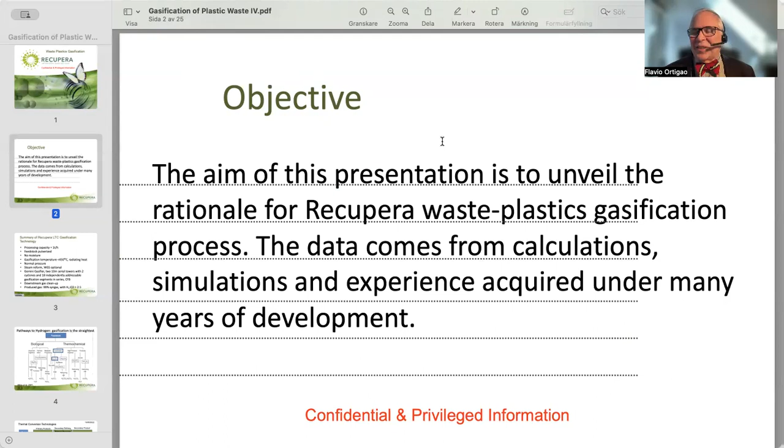So the objective of this presentation is to unveil the rationale of Recupera and Relab waste plastics gasification process. The data comes from calculation, from simulation, and experience that we acquired under many years of development. It took us decades to come to the point that we are today.

Let's make a resume here about what we call low temperature conversion gasification, and let's also say this is one of the important points, what is different from everything else. Low temperature gasification is something we have pioneered from an idea set forth in Germany, in Tübingen, but it was never reduced to practice in Germany. So we were the company that developed the gasification to work with this technology. This technology has one thing that you should remember: gasification below 450 degrees. Why that is important, I will come to that later, but this is very important.

The state of the art of gasification, there are two technologies available out there. There are, in fact, some 100 different types of gasifier. They are all different, and everyone was created for a specific purpose. So the purpose of the gasification is very important to the design and construction of the gasifier. You have always to ask, what is the purpose of this gasifier? But the gasifiers out there, they either work around 2000 degrees centigrade, or if they are plasma gasifiers, they will be around 4500 degrees.

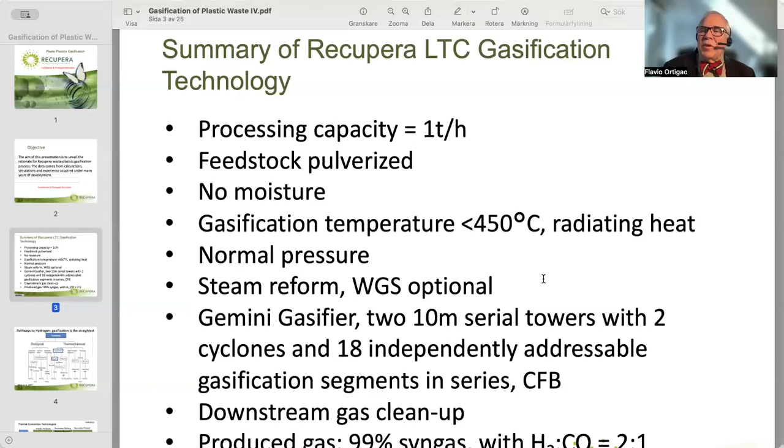It is normal pressure. Some people will start always telling me, I know it's high temperature and high pressure. No, it's not. It's not high temperature, it's not high pressure. It's normal pressure and low temperature. That is how we do it. Some others, how others do it, well, I don't know. And of course, it is a steam reform, so we use steam to oxidize, to provide the oxidant for this gasification.

I will speak about gasification. One important point: water shift is not part of gasification. A lot of people say you have to gasify and do water shift. No, you don't. People who say that have no prima facie experience in gasification, because even the equipment is separate. Normally, when you gasify hydrocarbons, you do both reactions. But this is normally - we are not speaking about normally. We will speak about what we do, and the reason will come.

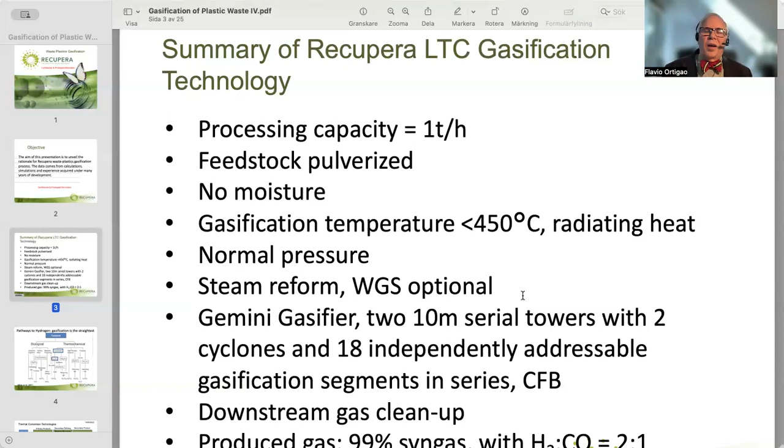So normal pressure, no water gas shift. It is a Gemini gasifier with two 10-meter serial towers with two cyclones and 18 independently addressable segments, which can be considered as gasifiers. So we would say I have 18 gasifiers in series. And why we do that, I will explain later. But this is the technology that provides the quality of our gas.

And what differentiates us from the rest? The quality of our gas, the way we do it, because this is fundamental to the purpose, to the applications that come downstream. And of course, the application is downstream processing. So we develop a gasifier that produces a gas that is not to be burned. The gas is not to be considered a fuel. The gas is not to be used to produce energy. The gas is to be used for chemistry, as feedstock for renewable chemistry. This is the reason why we develop our gasifier.

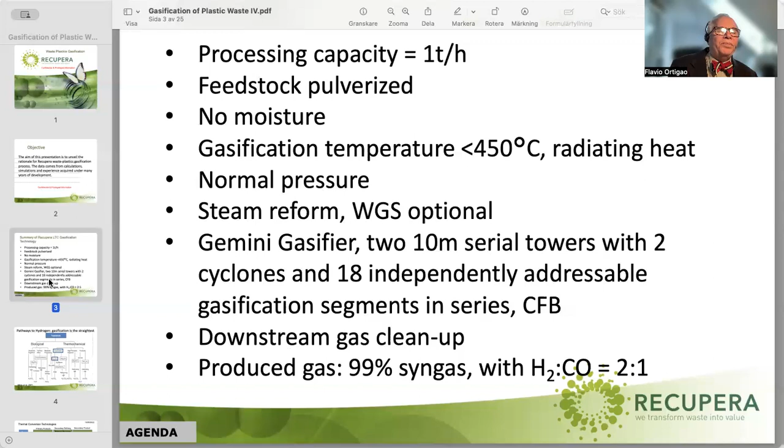One important point: gasification occurs almost quantitatively. People who know gasification will know that. Gasification is different from pyrolysis, where you have three phases - but I will speak about that. It's almost quantitative - you will get 99.9, 99.99%, and if you purify, 99.999% syngas. And syngas, this definition is very clear and has been in the literature for 200 years. So please, this is not really new. This is something that's very well established.

Syngas is a gas composed essentially of hydrogen and carbon monoxide. Of course, in this 200-year history, the quality was not always the same. So syngas in the beginning was very dirty, very contaminated with a lot of stuff. But with time, more and more syngas has been cleaned and produced with high quality, and high quality syngas is only hydrogen and carbon monoxide with a ratio of 2:1. So this is by definition syngas. Now,

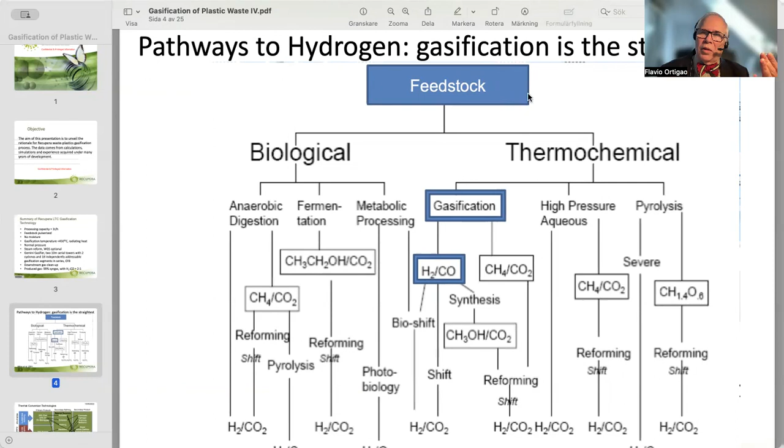Let me tell you why we choose gasification. We could have gone to other technology, and of course in recycling of plastics there are many technologies out there. Why do we choose gasification? Because if you compare, there are technologies which are biological and there are thermochemical process recycling processes. I'm talking about the feedstock - waste plastics, but it could be any carbonaceous feedstock - could be wood, could be biomass, you name it, as long as they have carbon. Gasification is the straightest way to producing hydrogen and carbon monoxide. And in many applications you are looking for hydrogen and carbon monoxide pure. So there is no other way to produce it as straightforward as gasification. And that is the reason we have gone for gasification.

Of course, after the gasification, if you want to boost the production of hydrogen, you may go to a water shift reaction - you may add a separate reaction, but this is already downstream processing. Gasification: one step gasification, and you have syngas. And this syngas can be used for synthesis, and I will speak about that later. This syngas can be used - so gasification is the straightforward pathway for producing gas. All the other technologies will take a lot of steps to come to the same thing. And each step, if you understand thermodynamics, you know that each step you have to pay something. There is no free lunch, not in thermodynamics.

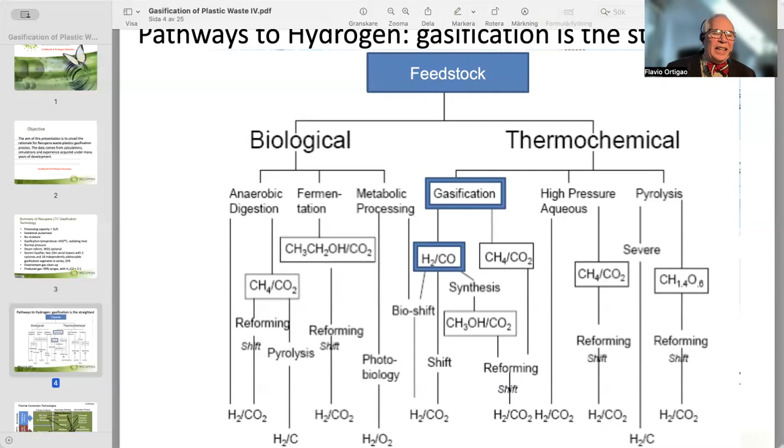So that is how. Now let me speak about the most related technology, because all the time people get somehow confused about that. There are three technologies. They are related, and these technologies are pyrolysis, gasification, and incineration. They are related, but by no means are they the same - they are completely different.

Pyrolysis is a technology that is anoxic. There should be no oxidant whatsoever in a pyrolysis reaction, because you are breaking the molecules internally with heat only. It is allothermal, meaning you need to add external source heat all the time to the system. Pyrolysis always produces three products: char, oil, and a gas, which we call strong gas. By no way is this gas to be called syngas. It's not syngas - this gas is from the homologous series C1 to C4, and this has nothing to do with syngas. It cannot be syngas because you don't have oxidant - if you don't have oxidant, you cannot do partial oxidation. Gasification - pyrolysis can be run from 450 to 2000 degrees. That's normally the temperature people run pyrolysis.

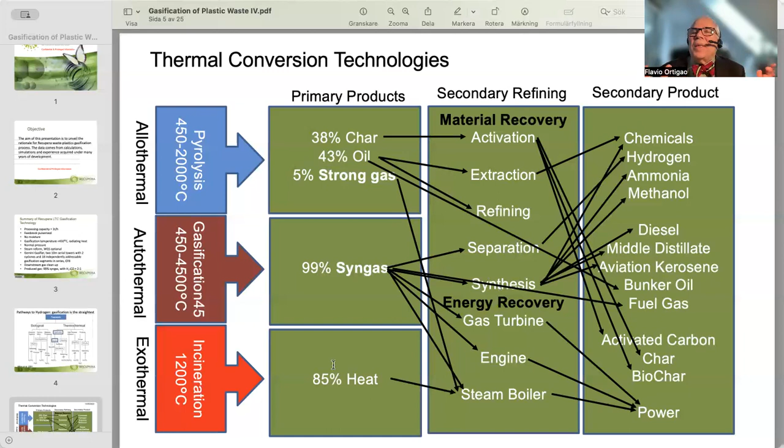Now I want to make a kind of resume of what I have been talking about: thermal treating benchmark. Combustion's main product is heat and flue gas, and the flue gas is not fuel gas. The flue gas is the extinct carbon dioxide, which has energy only as long as it's hot, because when it's cooled down there is no energy - you cannot use it for anything.

So heat and flue gas from combustion. Gasification produces a combustible gas called syngas, and heat. That is gasification. Pyrolysis produces an oil, which is combusted, a combustible gas not to be confused with syngas, and char.

The energy balance: combustion is extremely exothermal, incineration is the most exothermal. Gasification is autothermal, meaning all the heat you need in the process comes from the material you are gasifying, especially when your material is plastics. When gasifying plastics, all the energy you need comes from the plastics. You don't have to add any energy to the system.

And pyrolysis is a completely allothermal process. You will always have to add energy to the process.

The main product constituents: combustion produces CO2, water, and nitrogen. Nitrogen isn't a product but comes from the air, of course. But you have CO2 and water, as I said. Gasification gives you syngas, which is carbon monoxide and hydrogen. That's it, this is syngas by definition. There's nothing else. The other things you may find are contamination, and you don't want contamination in a pure product.

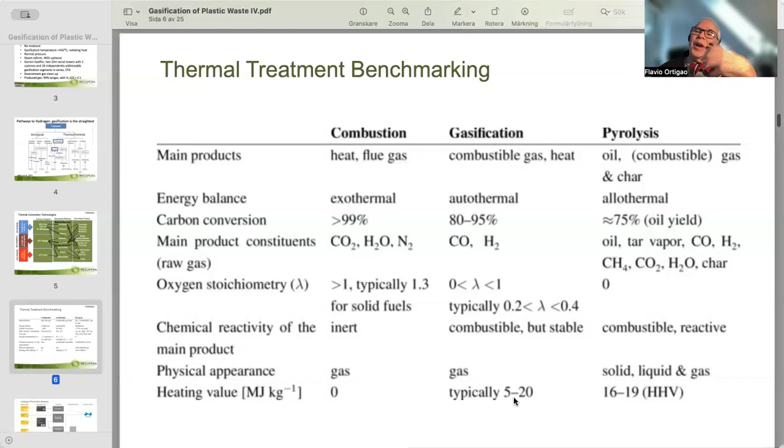Gasification produces a gas with a very nice heating value, around 5 - but if you work with plastics, it will be more like 11 to 20 megajoules. So quite a nice energy that you can use for doing a lot of things. Now, exergy is the name of the energy that can be used for doing work - that's exergy. So this is the difference, and I hope I have explained the difference between combustion, gasification, and pyrolysis before we continue a bit further.

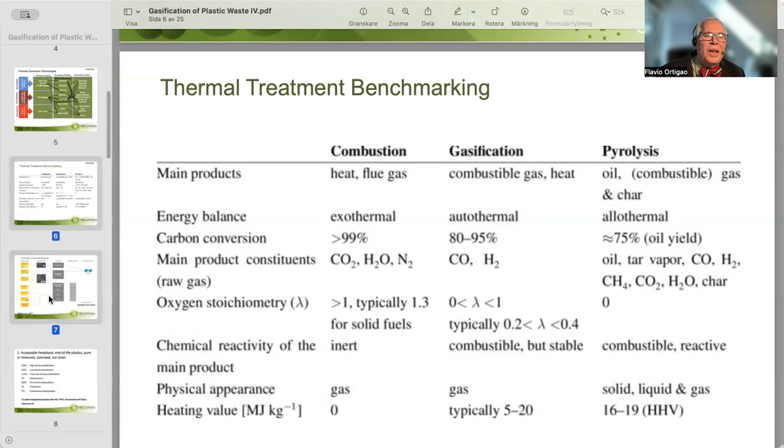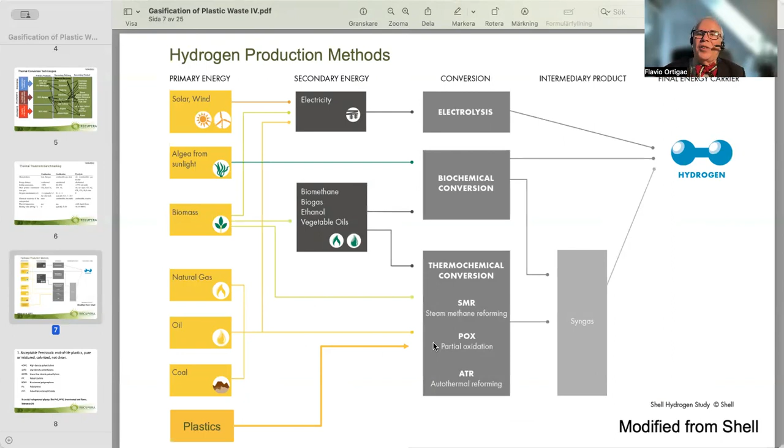Now, a lot of people come to me to use these systems for producing hydrogen. Hydrogen is one of the two products of syngas. Syngas is carbon monoxide, which is a commodity, and the other commodity is hydrogen. Everybody's looking for hydrogen - there are different methods of producing it.

And here, I borrowed this from Shell. I just added plastics here, because Shell had coal, oil, natural gas, solar, wind, algae, and biomass - different processes. But one that is commonly forgotten is this one. Plastics are hydrocarbons, meaning they are composed of hydrogen and carbon. So we can consider plastics as carriers of hydrogen and carbon - carriers of renewable hydrogen and carbon.

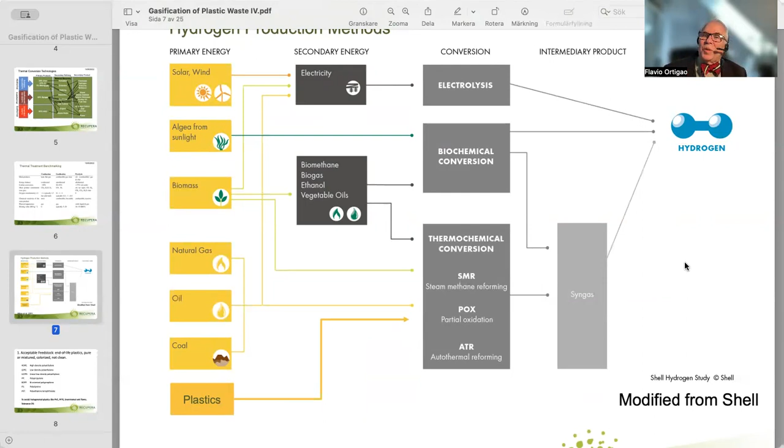And of course there's the technology we use: steam reforming. You take plastics, run them through steam reforming, which is gasification, and you get syngas. Syngas can be separated into hydrogen. So this is totally correct - Shell is one of the largest producers of syngas in the world, so they know it inside out.

Now, we have decided both in Recupera and for all in Relab to work with plastics. One of the reasons is that plastic has more energy than oil. Mixed plastic has 39 megajoules per kilo, while fossil oil has around 42 to 44.

It depends on the quality, but around 42. That's for mixed material at 39. If you go to certain types of plastic, like HDPE, this has more energy than fossil oil. So here we have a material with higher energy value than fossil oil. Why should you be using fossil oil when you can use HDPE, LDPE, and PP?

These are the so-called olefinic plastics. Olefinic plastics are by far the best material you can use to gasify, and that's of course why we're looking for that.

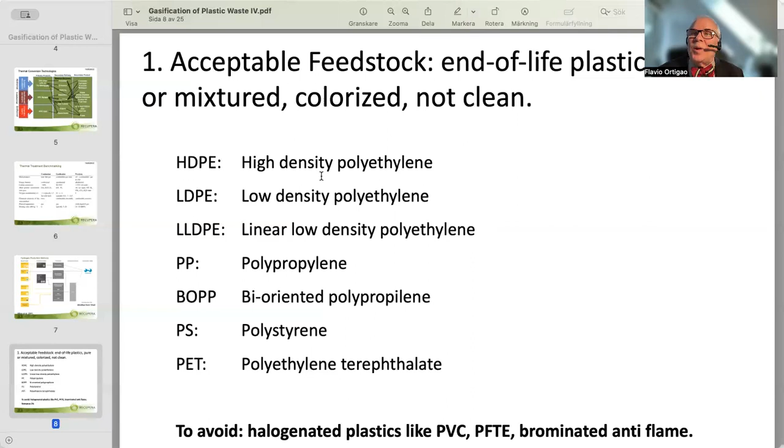So here are the different materials that we gasify. Often people ask me, what about PVC or PTFE, brominated anti-flame materials? No, we are not looking for those. The reason is that when you gasify PVC, it produces hydrogen chloride, a strong acid, and fluoride is also a very strong acid, and that will corrode the equipment. In order to have a long life of our equipment, we must reject that. The tolerance is 2%, but we are really not looking for those modified with halogens.

These are halogenated plastics, and the reason we avoid them is because they destroy the gasifier. Of course, we could construct a gasifier that would tolerate this - we've tried that, and you can do it - but it's much more expensive to produce. Normally, 80% of packaged plastics fall into the category we do use, so you don't really need to go to PVC. PVC is today not common for many reasons.

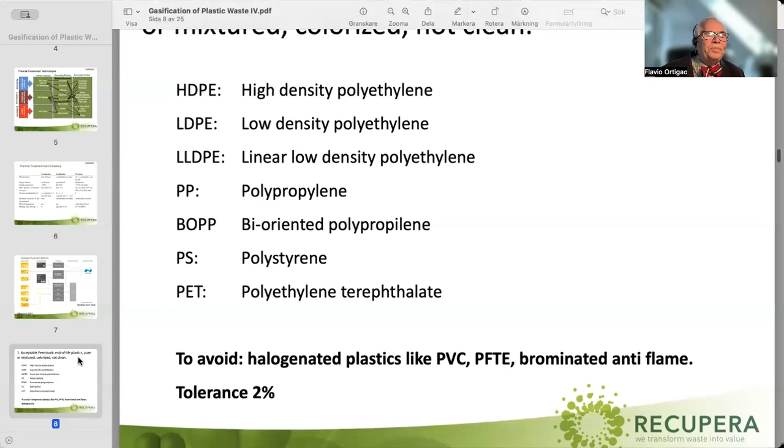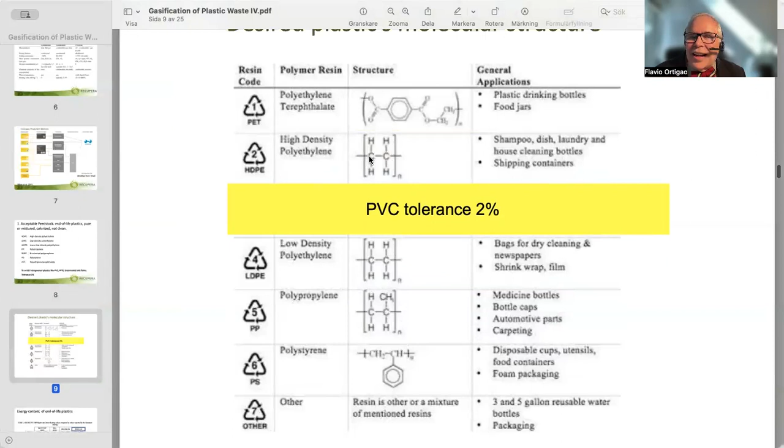So these are the plastics we use. Now, I don't want to go too deep, but this is the chemical form. I just want to stress, when I say that plastics are carriers of hydrogen, this is a typical olefinic plastic - you have carbon, and each carbon carries two hydrogens. This is the chemical structure of plastics, and that is how it is. We cannot change that, and it's very important that you understand that.

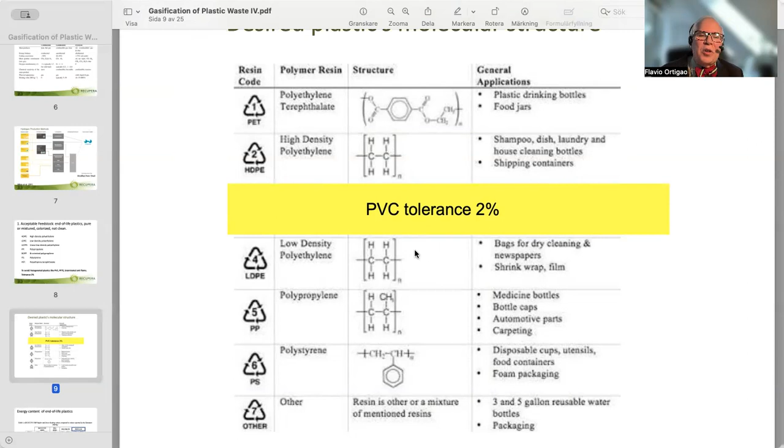Since plastics are carriers of hydrogen, waste plastics are an excellent material source for green hydrogen, which we've started calling white hydrogen, because we have to separate it from green hydrogen - which people associate with electrolysis. This is not electrolysis, this is chemically produced. But hydrogen, as you know, has no color, so call it as you want. Hydrogen from carbonaceous waste material is what we are talking about.

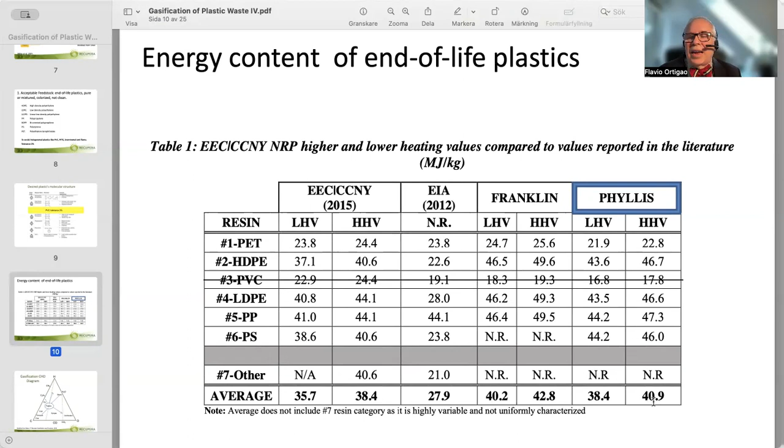Now, regarding the energy content of plastics - there are different tables, and people have computed different values, but I'm talking about this one here. The average heating value is, as I said, 38 or 39, and the high heating value here is around 40. This is the low heating value and the high heating value, you can choose. There are different numbers given in the literature, but this is the one that people most likely use. As long as you use one consistent technology or source of information, you should be fine.

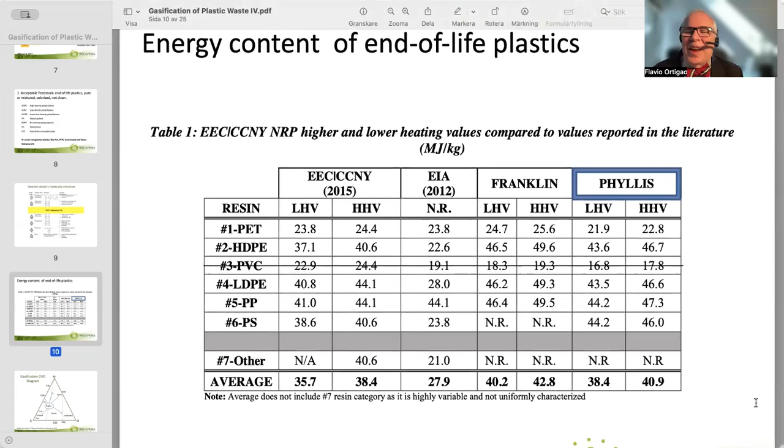So if you start with very low, almost zero, oxygen content, you are doing pyrolysis - you are not doing gasification at all. The products of pyrolysis are three phases: you produce carbon, you produce some oil, some hydrocarbon oil, and you produce some gas. The major gas of pyrolysis is methane, but you also have ethane, propane, and butane. They are all gases and will be mixed together, especially methane and ethane, in the pyrolysis gas. But of course, you are not producing any syngas this way.

Only when you come to the oxygen ratio between 0.2 to 0.4 do you start seeing syngas. Then you have syngas.

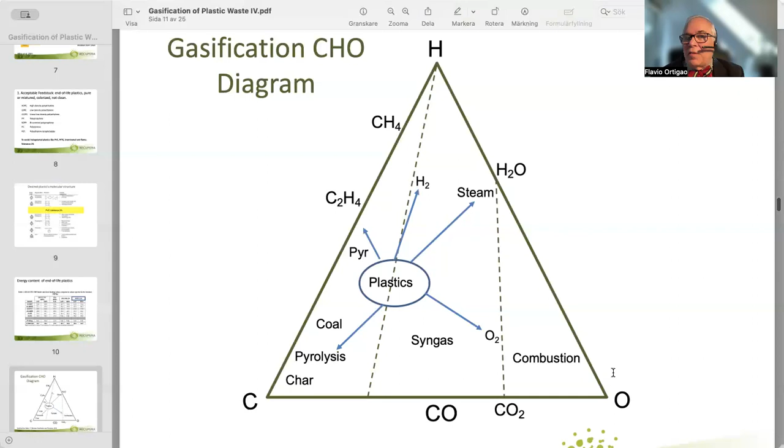When you start seeing CO2 in your gasification process, you know you are having combustion, you are adding too much. In fact, you have to use the presence of CO2 to regulate. It is a sensor telling you your reaction is going too far toward oxidation, so you have to throttle the gasifier to maintain the balance.

This is a fine dance, a dance between carbon, oxygen, and hydrogen. How to control this dance can be complex. That is why we have invested a lot of time developing the software. It is part of our innovation, the software that controls this dance of atoms responsible for gasification.

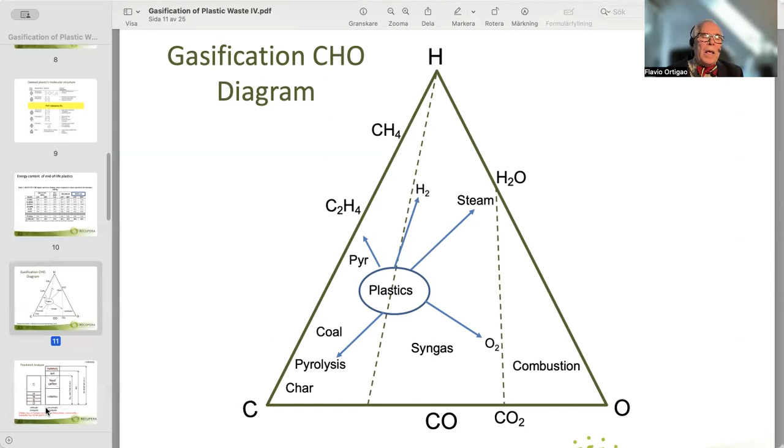One point I want to make, especially when gasifying plastics: plastics are composed of carbon and hydrogen. They may have other heteroatoms, especially in contaminations, but plastics are mostly derived from naphtha. Naphtha has been purified, it is not raw oil, and sulfur has been removed from it. So plastics are purified hydrocarbons.

And that is also the advantage. Why should you go for unpurified hydrocarbons as a source for your chemistry, when you can have already purified material that people now consider waste?

Plastics have no fixed carbon, unlike biomass. That is the reason you don't get chars when gasifying plastics. Plastics gasify, as I said, to 99.9%.

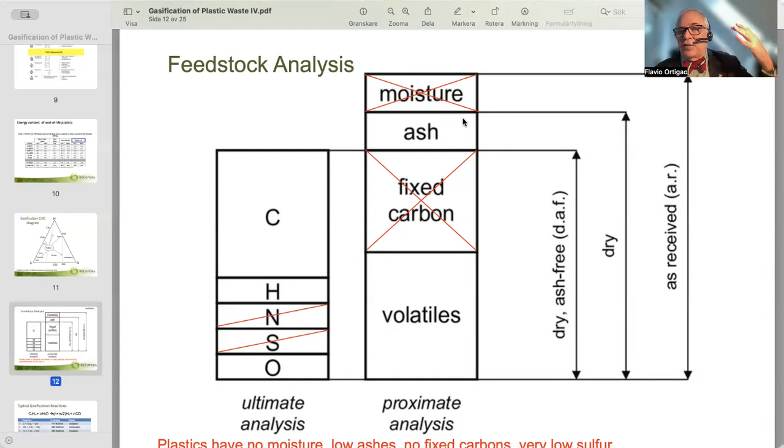So the ashes will be any mineral, depending on the temperature you are gasifying at. In our case, since we are not volatilizing the inorganics, all the inorganics in the plastics, all the metallic, inert contamination, will end up in the ashes. If the plastics are not heavily contaminated by silicates or earth, which is normally not the case, the amount of ashes would be minimal, around 0.1%. This is what you should expect.

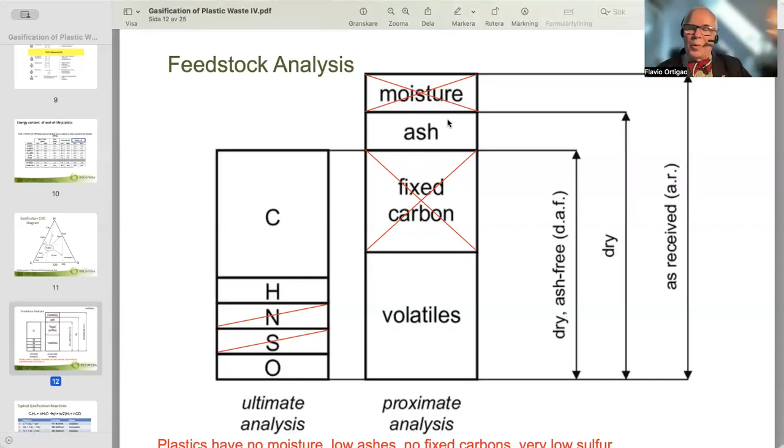Of course, if the plastics are coming from agriculture, fully loaded with earth, then you will have a lot of ashes coming from the earth. But if the plastics come from packaging, they may be contaminated with some ketchup or mustard or whatever, but it's not really much.

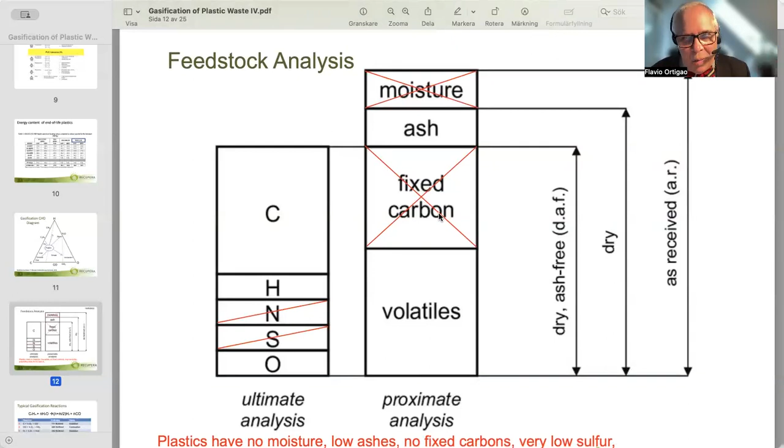Very important: plastics have no fixed carbon, unlike biomass, which does. That is also reflected in the volatiles. Plastics are very volatile because carbon and hydrogen go directly, 99.9%, to the gas phase, so you are not expecting anything else.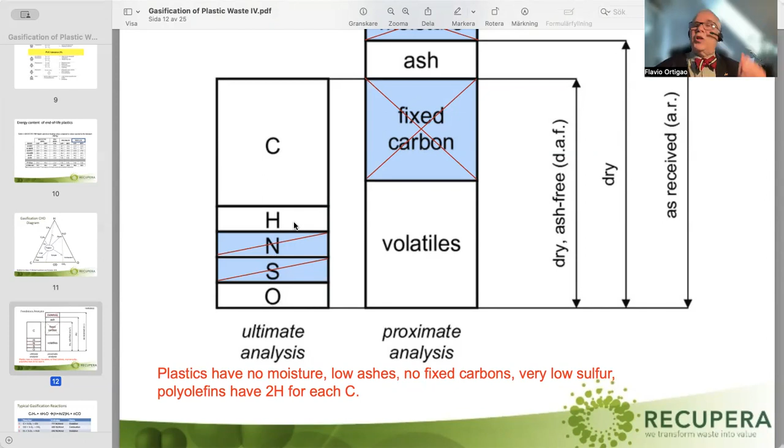Low sulfur, very low sulfur. Plastics like polyamide have amine, so you get ammonia coming from polyamide. But if the plastics are olefinic, there is no nitrogen, no sulfur, and no oxygen either. The plastic has only hydrogen and carbon, as I showed you in the formula. So that is the only thing you have to deal with.

Now, gasification has been around for a long time, 200 years. The first gasifier was built in England in 1823, so 201 years to be exact. And it's not magic, it has nothing to do with magic. Gasification is a chemical process, and quite complex.

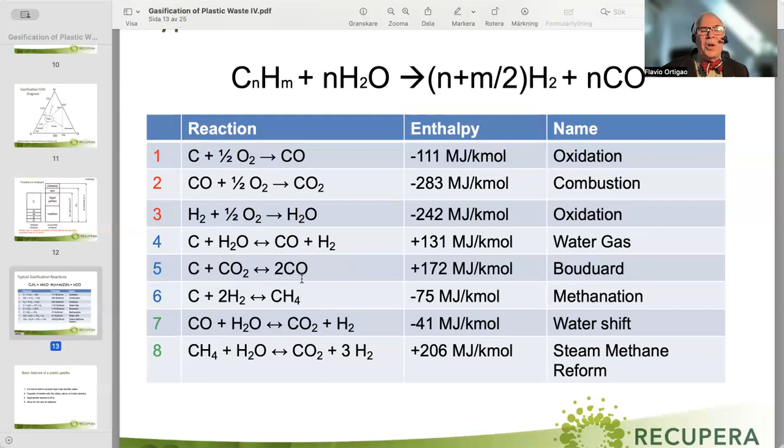These are all the reactions. I'm not going through all of them to explain, but many of them cancel out. You see here, you are producing CO2, but down there you are using CO2 for the reaction, so they cancel each other. The overall reaction for plastic is the one shown here.

This is hydrocarbon, the only thing you need to know. Hydrocarbon will react with the steam, and steam is water vapor, which has hydrogen and oxygen, and it will produce hydrogen and carbon monoxide.

So these are the reactions, and this is totally based in science. There is 200 years of evidence to that. I'm not inventing anything here.

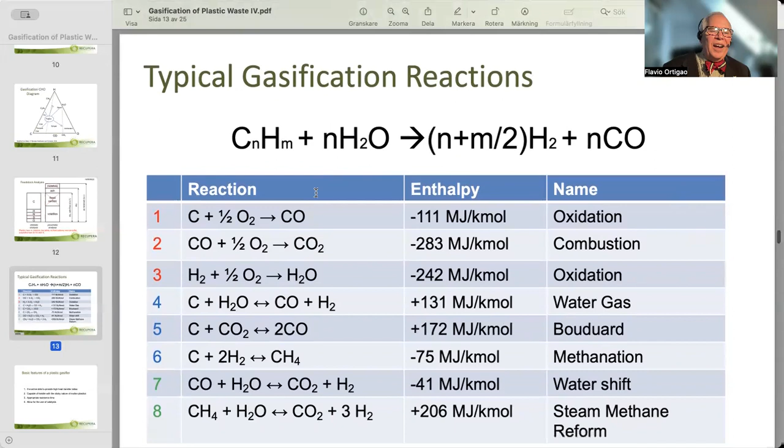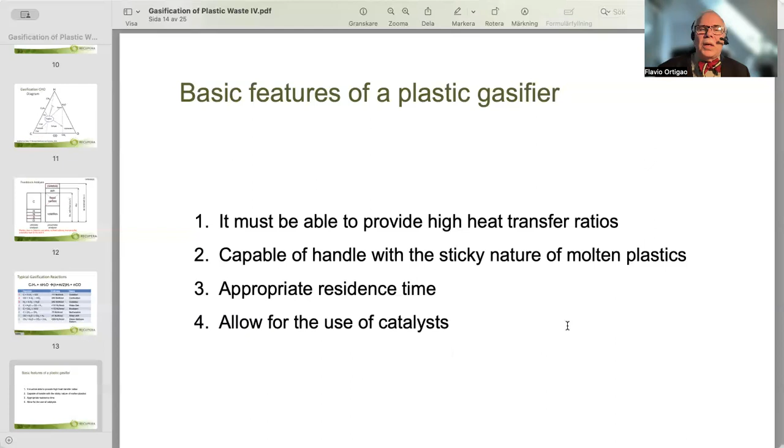And of course, in some cases, especially depending on the contaminants or the type of plastics, you may want to use different catalysts, for several reasons, even for purifying the gas. So you need to be able to add catalysts in your gasifier. But these are very simple features. We have done a lot of work to have this process done this way.

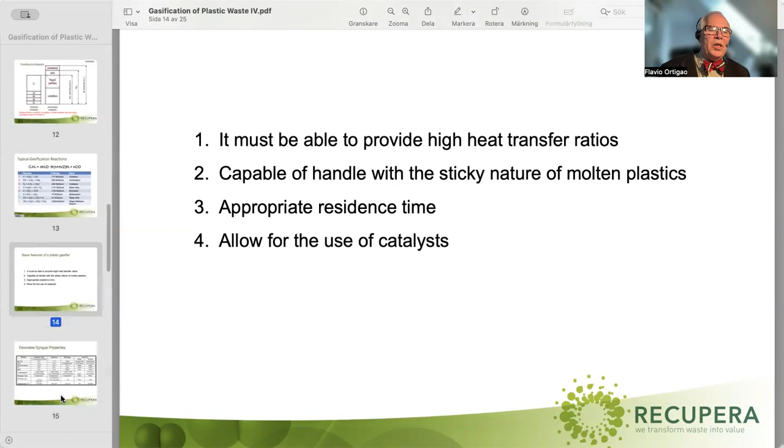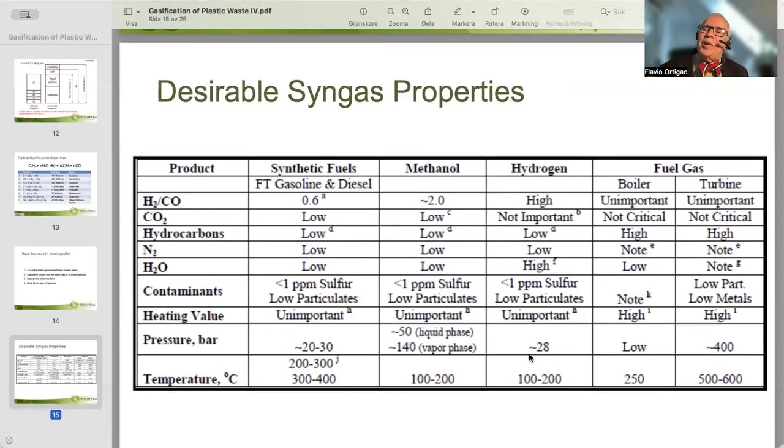And of course, there are different pressures here—this is not associated to us, but in our case, the pressure is close to one, at 1 atmosphere, 1 bar, that is the pressure. And the temperature here is very low, 100 to 200 centigrade, for the hydrogen you want. But if you want the optimal syngas, it has to be above 200 degrees, because 200 degrees is the ceiling temperature of plastics—you will not gasify plastics below 200 degrees. So it has to be above 200 degrees.

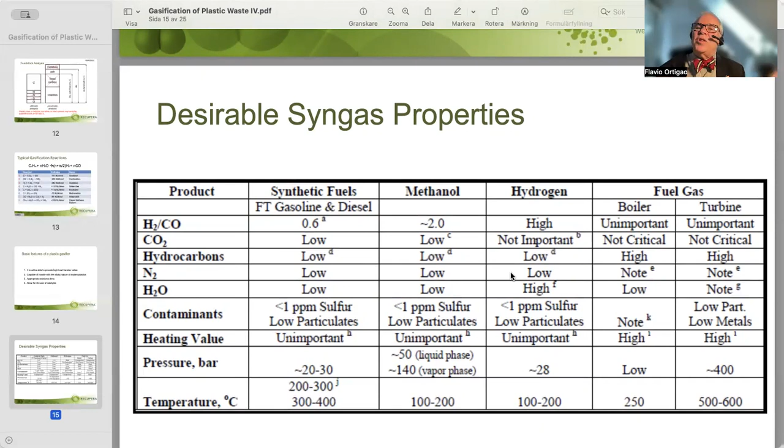But anything from 200 to 450, which is our maximum temperature. And why is this the maximum temperature we want to go to? Because benzene polyaromatics start forming at 500 to 700 degrees, and dioxin is a polyaromatic, so dioxin will also form around this temperature. We don't want to have dioxins, we don't want to have aromatics in our gas, and we don't want any contamination with this very dangerous substance. That's the reason we do the reactions below 450 degrees.

Gasification itself, as I said, there is no mystery, it's not magic, but you need a gasifier. It's dependent on the parameters we spoke about, and you can count the molecules. The molecules that you feed in are the same that you find as a product and in the ashes, unless you remove them as a contaminant. Everything goes in and becomes syngas, the product gas. Then you have some ashes, as I said about 0.1%, and you may have some contaminants which you are removing because you don't want them in the product gas.

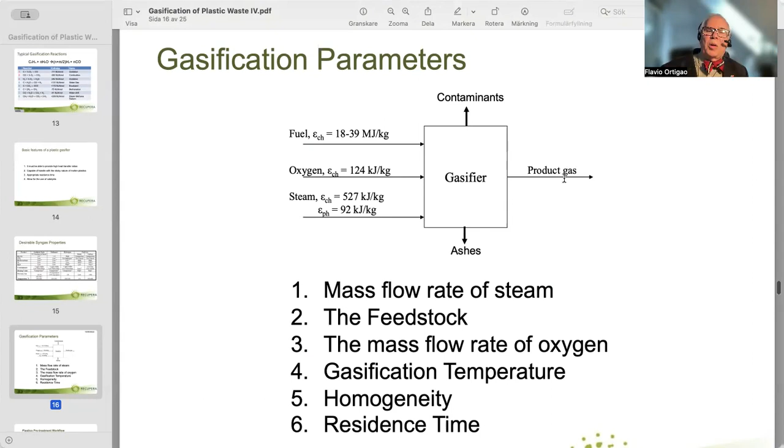What determines the syngas high quality? The mass flow rate of steam. If you are, as we are, gasifying with steam, you need to have the flow rate of steam under check. The feedstock, of course, is very important, and different feedstock will give different results. Very clear. The mass flow rate of oxygen. If you are gasifying with oxygen, you need to compensate the mass flow rate of the oxygen as well.

The gasification temperature, absolutely important. As I said, we work below 450 degrees, and you have to set all the parameters to be able to work under 450 degrees, as we do. Then you have, of course, homogeneity. How homogeneous is the material? This is preparation of the material. You have to prepare the material in a certain way that's very homogeneous. We said that we pulverize, and the way of increasing homogeneity is to pulverize the material.

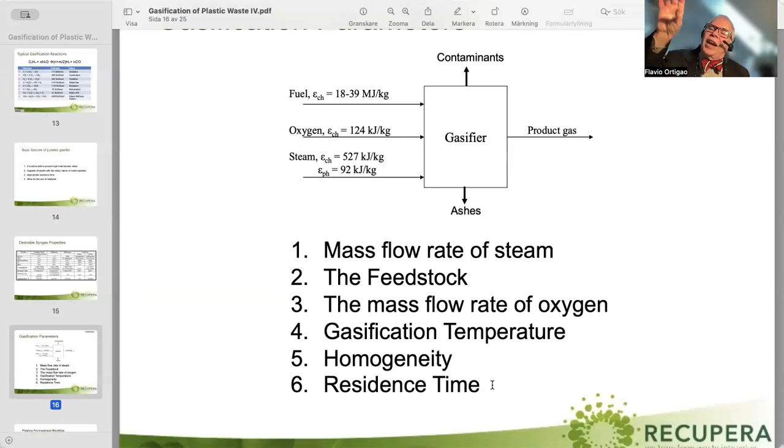And of course, the residence time. We have for each reactor, each segment, a very specific residence time that we control very well with our software.

By doing so, then you have here the plastics pre-treatment workflow. We get plastics mixed and dirty, we collect them, the plastics are pressed, sent to a warehouse, and from this warehouse we take the amount of plastics we need on a daily basis, we shred, we micronize, and then we give the plastics to the gasifier. So this is the basic pre-processing that we need to do.

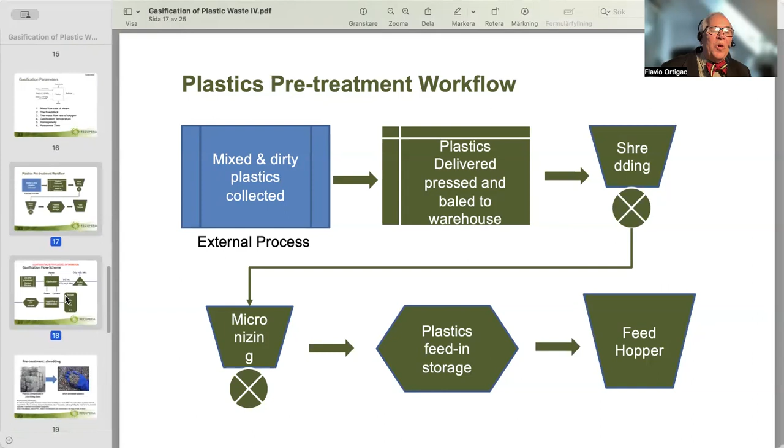And then you have here the gasification process. The dry and pulverized plastics or carbon source are gasified with steam, with oxygen, with heat, if heat is provided by the process, but when you start up you need external heat. Then when the gasification process starts, you're using the heat from the plastics, but you need the heat. Then, of course, you are producing a small percentage of ashes and producing your gas, which may contain some contaminants if they were present here. If amine was present, we will have...

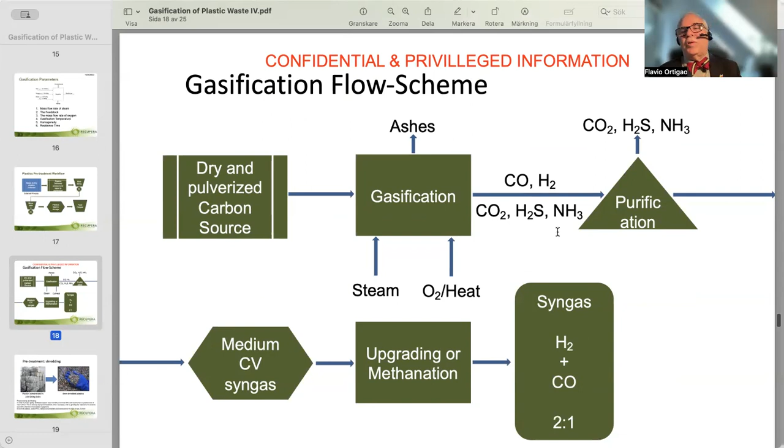NH3, ammoniac. You have ammoniac here. If sulfur was present, you will have a sulfhydric gas here. But if none of that was present, and also if you do the gasification well, you don't have CO2, you only have CO and H2, which you can or not pass through a purification.

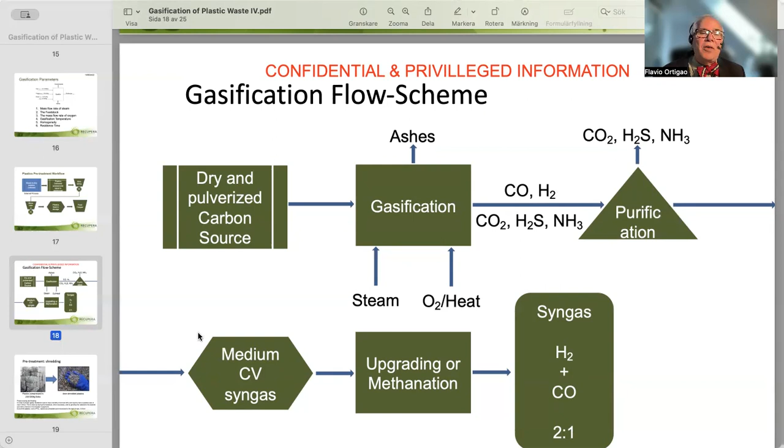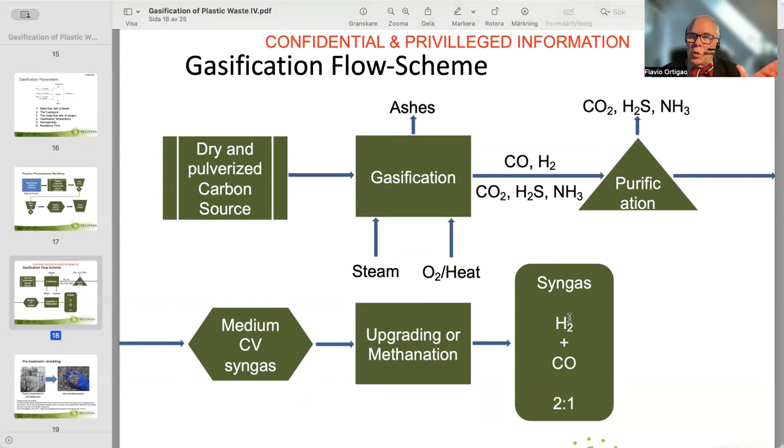And then you have a pure syngas here. And then, of course, methanation is something you could do when you want to increase the heating value, but if it's not going to be used as fuel, you don't need methanation either. It's just to show that you can add some processes to your gasification. And then, of course, you have a syngas with this composition, pure syngas as H2 and CO.

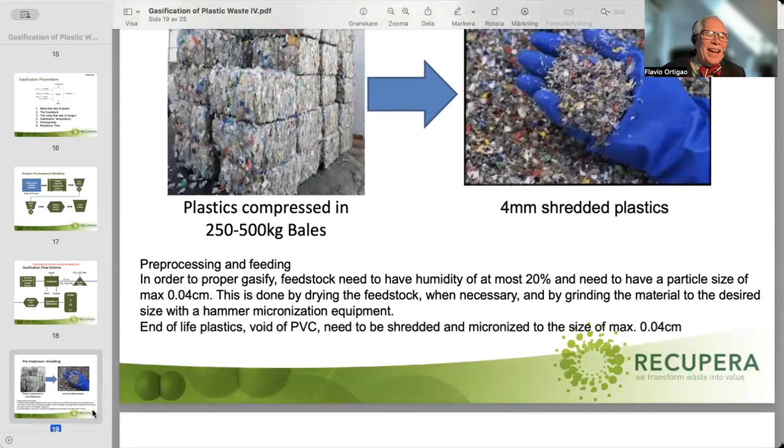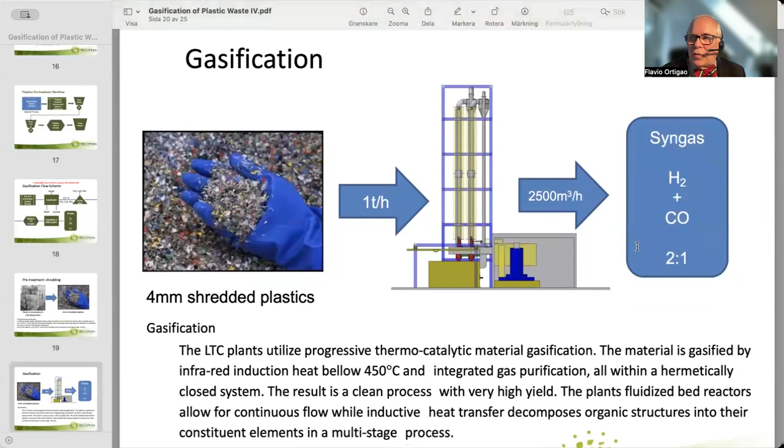So this is basically, just to show a picture, that's the plastics, the waste, and this is the plastics pulverized, and the plastics pulverized are going in this schema for gasification, processed at 1 ton per hour. For each hour, we produce 2,500 cubic meters of pure syngas. And this syngas is not to be used as a fuel, not to be burned, but to be used for chemicals, for the production of chemicals.